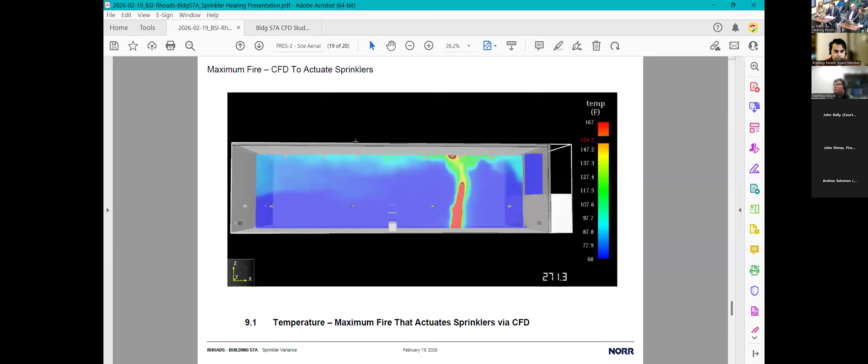I think Mr. Parikh had asked that question, whether it was required. So the ventilation is required. What was different, what we were proposing, was the automatic mechanical smoke removal. We'll get into that in a little more detail, but I just wanted to answer that question quickly.

Additionally, the question that was asked was for us to identify and analyze reasonable worst case scenario fires. Our experts spent additional time understanding the operational requirements of the proposed use, talking to Rhoads' operational people, reviewing their procedures, did additional computational fluid dynamic modeling, and came up with what he believed were the worst case fire scenarios. Bob will be testifying to that in a second. Ultimately, the pallet fire that we described was still the worst case fire that we could come up with reasonably.

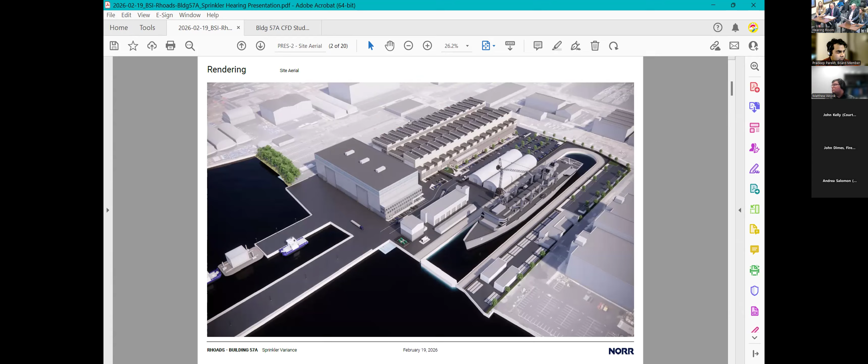One of the other things that was mentioned was the liquid propane gas line, if that were to catch fire. We reviewed that. That was actually lower in megawatts than the wood pallet fire, but we still looked at it. In that review and design, since we're trying to get this right, that requires a manual shut off at the tank farm. We're proposing an automatic shut off at the building, so if there is a fire event or detection, that'll automatically shut off that gas line versus relying on manual shutoff. That's one of the additional mitigation factors we're proposing.

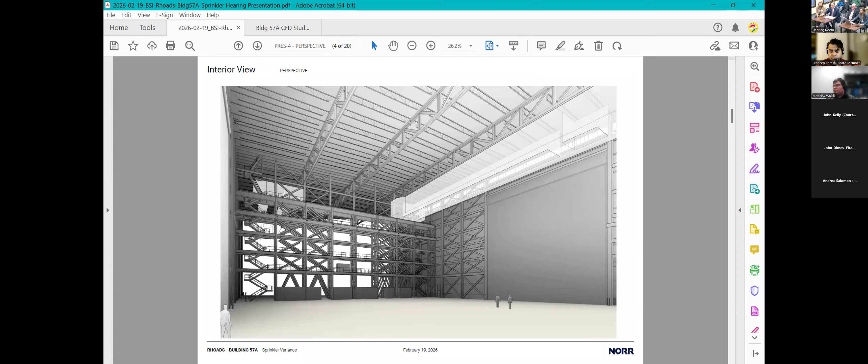Finally, for additional mitigation factors, and I'll get into this in more detail, but I just want to set the table: there were additional catwalks in the middle of the building. As you may recall, we have the office area, the toilet room areas, all fully sprinklered. The catwalk areas, there's 2 stories of catwalk areas that we expect to be occupied by workers during fabrication. We're proposing sprinklering those areas as well, where people will be occupied.

Speaking with the Rhoads team and Mr. Rhoads, we thought that was an additional safety measure for the lower ceiling areas where people are occupied, to add additional fire protection on those areas. I think the upper catwalk areas are really not typically occupied, so I think they're just for maintenance.

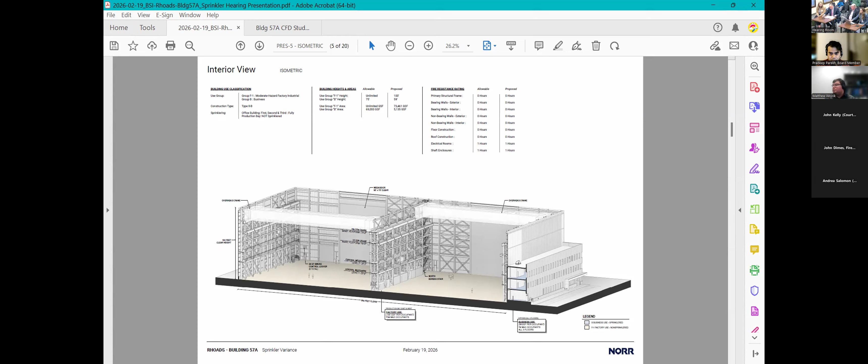So with that, I want to turn it over to Bob Moser to walk through some of the work that we've done, explain our findings, and then go into more detail on the additional mitigation measures. Bob, do you want to give a quick summary of the additional studies you conducted after our last meeting and what you found?

Yeah, so what I did was interview Rhoads to make sure I identified all the possible combustible loading for the facility. I came up with 9 of them, actually more like 10, but the last ones are well controlled. The combustible wood pallet is still a very significant fire risk. FM states that as one of their highest fire risks. It's like kindling, which is why it gives off so much heat.

The LPG piped into the building came in a close second. That came around 1.8 megawatts. It's a significant fire, so that would also be a very large fire.

I CFD modeled the LPG fire as well as the wood pallets. For the LPG fire, that gets significant heat at the ceiling, slightly below that of the wood pallets, but again well below sprinkler operating temperatures.

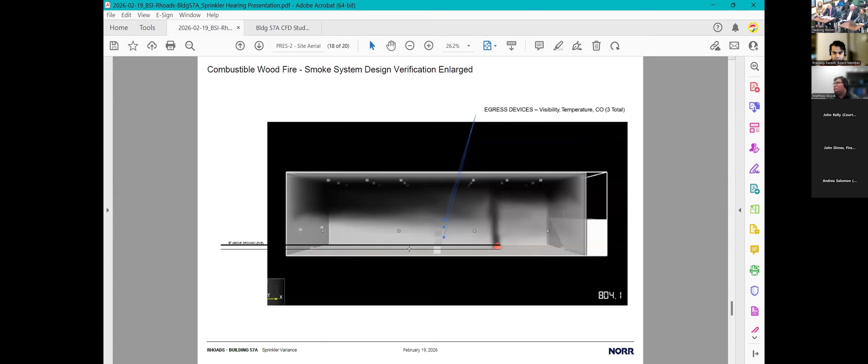Yeah, so that's what I did. I wanted to do a sensitivity analysis to find out where that number would be, because in the large scale fire testing, they came up with a number of 11.7 megawatts for a 2.5 - they came up with an 11.7 megawatt fire to set off 155-degree Fahrenheit sprinklers at a similar height. Actually, they were a little bit lower than this height, but that was the large scale fire testing.

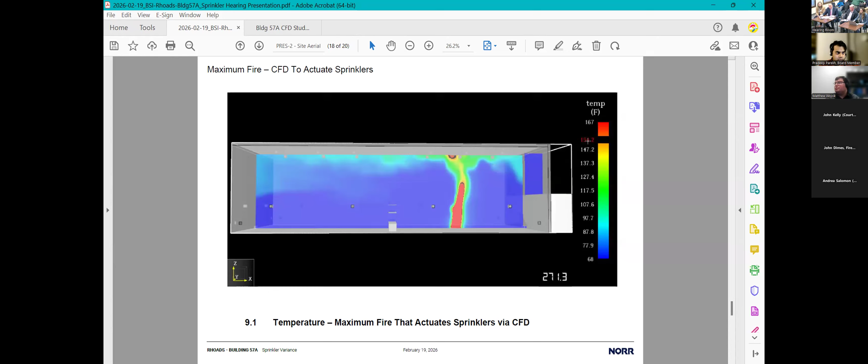So when we take the largest plausible fire, which was the pallets, the liquid propane, we discussed a cascading event where multiple things happened, because we wanted to make sure we looked at various scenarios, not just isolation. Like when things happen together. We looked at it, and I don't think it's linear, but even if you looked at it linearly, it's actually less than that. If you added a 2,500 kilowatt fire with the 1,800 kilowatt fire for the gas line going up, you're still well below the 10,000 kilowatts that would require the sprinklers to go off. So even if you added up all of these plausible fires, they still would not add up to enough.

Yeah, that's true. And one of the other things I looked at was the height rating of sprinklers. Sprinklers are only good to 60 feet, and we're at 102 feet, so we're well out of the range of sprinkler design.

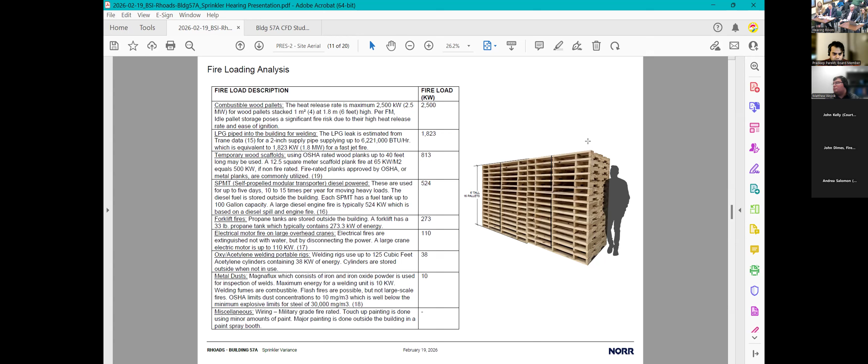Bob, tell us about the overhead cranes. Did you look at the overhead crane if that were to ignite? Yeah, I looked at the overhead crane, and that's an electrical fire. Basically speaking, if that went up, the way to stop an electrical fire is not to put water on it — that would be bad. What you need to do is shut off the electrical. So that's how you would address the crane electrical fire. And even so, it's not a large enough scale fire. Those are lower kilowatt, higher smoke type fires for electrical fire.

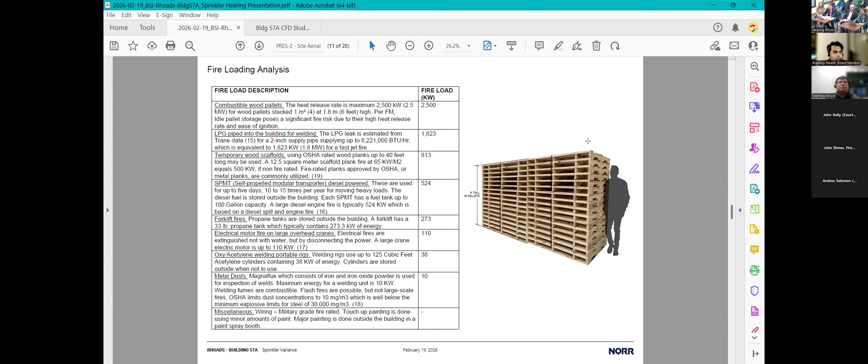Great. And then I think we walked through the heat. Do you want to just walk through the smoke controls? Yeah, what I found was, I went back, checked my modeling, went through everything, and it's up to a 75% reduction in the egress area if the smoke control was automatic and operated when the smoke developed. That's a significant savings in the amount of CO in those areas. That not only helps your egress, but also helps the firefighters if they have to fight the fire, since carbon monoxide is one of the most dangerous things you can expose anybody to during a fire.

So Bob, just so I'm clear, the smoke control is required, but it's manual — if someone has to go in, you have to turn it on in the fire room. And what we're proposing is automatic, so that when the fire alarms go off, when it detects smoke, the controls automatically go on and start to exhaust.

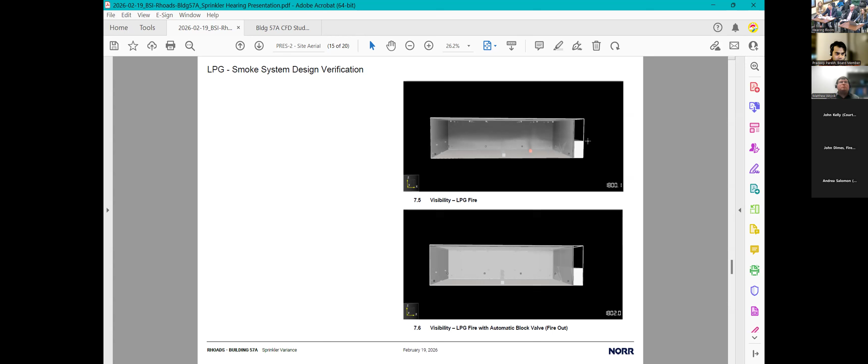So I looked at that too with the LPG fire. After 30 minutes, it exhausted all the smoke, which is really good, right after the fire. So I think it's beneficial to have an automatic versus a manual system. I believe the code just requires a manual system so firefighters could exhaust the smoke after the fire's over, but I think it's better to exhaust the smoke as the fire is going.

So again, I'm just a land use lawyer, so I'll speak like a layman here — the code really doesn't contemplate this type of building, correct? No, this is outside the realm of building code: 102 clear feet to a fire load, basically 10 stories open. So there's an inconsistency because the sprinkler requirement is rated at 60 feet and the building height is 102 feet.

So what we're proposing is additional mitigation measures that are not in the code, that we think will improve the physical condition here, even though it doesn't exactly fit in the box. So adding the additional automatic shutoff valve for the liquid propane gas, adding automatic venting beyond the code, and adding additional sprinklers in the occupied mezzanine catwalk areas. I guess that is required, but we wanted to make sure that we added that from our original proposal. So Bob, I'll leave it with this.

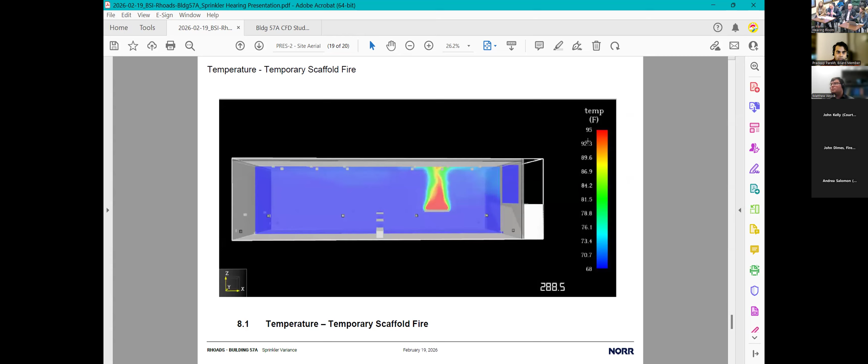So I guess the last thing we wanted to let you know is all of the worst case scenarios that we tried to study. So what you did, you put automatic smoke controls in, you sprinkled the mezzanine, and you put a shutoff valve in for the liquid propane gas, whatever's coming in. Automatic? Automatic, okay. The occupied parts of the mezzanines. Yes, correct, the occupied parts.

I did want to confirm with the fire department, would they prefer a manual shutoff with it? So let's say the system has automatically activated, would there ever be a time in firefighting operations where they would want to intervene and shut it off? Yeah, both would be good. I mean, the automatic function's great, but there may be a scenario where that could be the case.

I do have one other question though. Again, I tend to be on the side that if you put in a system where you really can't scenario a case you need it, just for the sake of putting it in doesn't seem prudent. However, being in the buildings I've been in, you can have the same type of occupancy, but later the process changes for some reason. Say you're building submarines or ships in this building, and all of a sudden, for whatever reason, the interior of the building, which maintains the same occupancy, now the design is different, and a sprinkler system would be beneficial.

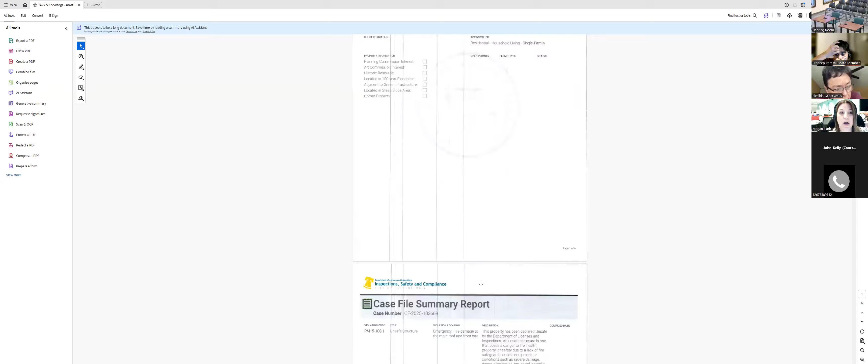And that is it. So the department is looking for a permit to be issued in 60 days. Okay, permit in 60 days? Yes, okay.

Miss, do you have anything to say about that? Yes, sir. As on record, we appealed it and reported that we did not have the insurance money at that time. The insurance letter came to me the second week in December of 2025. At that time, I tried to understand what my insurance, which is a lender-placed insurance, was and what their process was. It was quite difficult to understand because what they had on paper and what they were telling me were not quite the same.

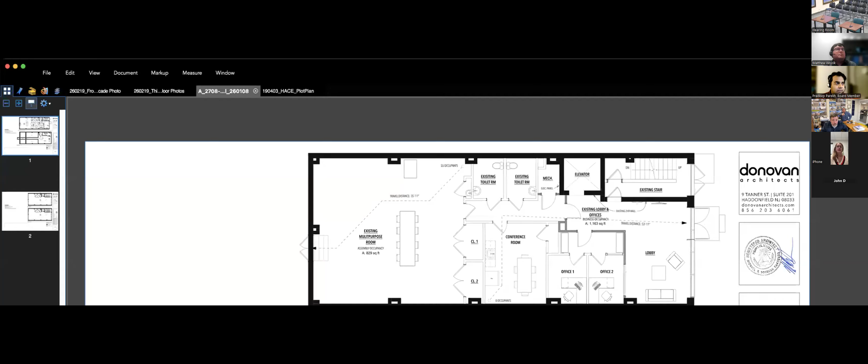If I may interject? Sure. Yes. When we purchased this building, it used to be a die cutting business, an industrial building many years ago. We purchased it to have one of our offices located on the corridor to provide services to small businesses. At the time, we couldn't occupy the second and third floor because we didn't have enough funds to install an elevator.

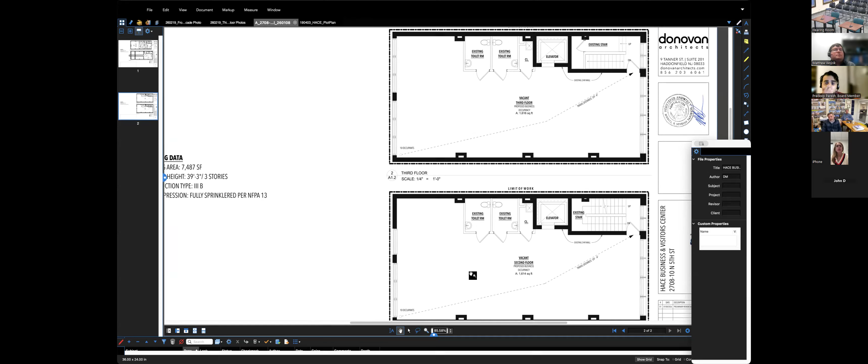And due to the commercial use of the building, we would have been required to install an elevator. Now that we have been able to raise the funds to install an elevator, that's why we wanted to activate the second and third floor, because even if we would have met the code, we still couldn't use that space because we needed an elevator for handicap access. Also, we're very restricted.

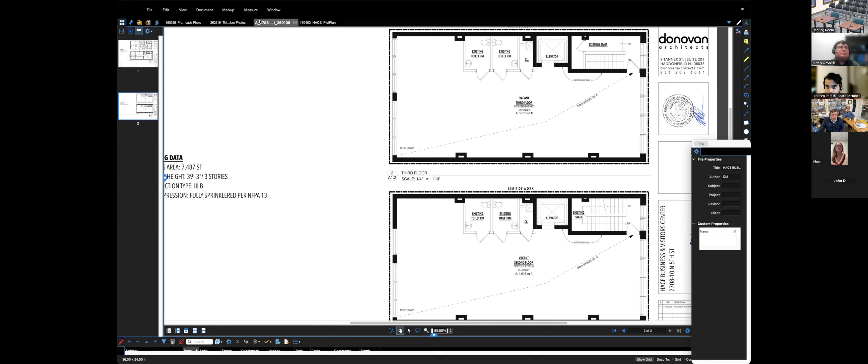If we had to build another means of egress, we would have done so. But the alleyway in the back, this building is pretty much boxed in, it's just a 2 or 3 foot alley. Even if we built a means of egress from the back, there's nowhere anyone can go because we're in essence boxed in. That's how those structures back in the day were built, and there isn't a lot of room back there.

Is this 4 floors or 3 floors? Three floors. There's just a stairway on the third floor that says going up. Yeah, that accesses the roof. There's a roof access. Oh, okay.

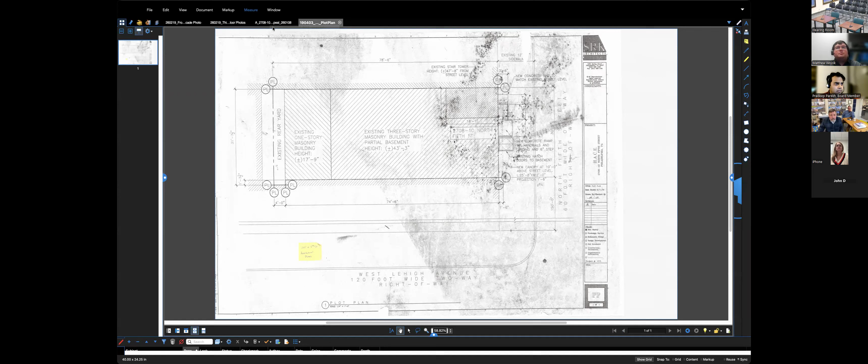So I have the plot plan up on the screen that shows the existing rear yard that's landlocked. So this is Lieutenant Dimes Fire Code. Is your contention that it's a 3-story fully sprinklered building and you don't need a second means and by right it should be allowed, or are you looking for a variance?

We're looking for a variance. We understand it's not permitted by right. Okay, I thought you had said that. Sorry, but it would be permitted on the second floor because we're under 20 occupants. Got it. And for L&I, the building isn't required to be sprinklered from what I can tell, but I just want to make sure. No, I don't believe so. The means of egress refusal doesn't depend on the building being sprinklered or not.

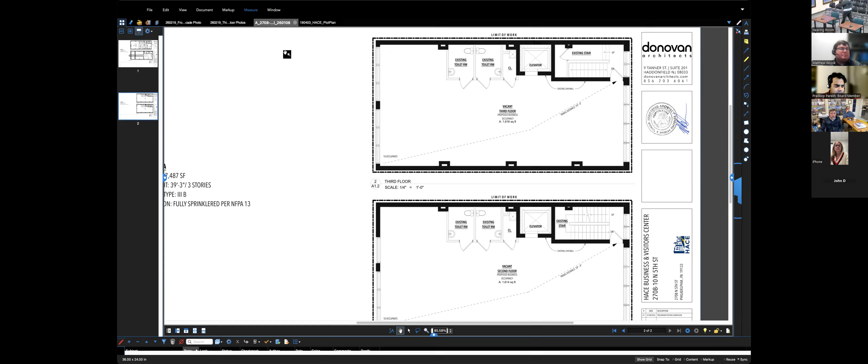It's the change to a higher hazard use, solely due to the affidavit of restricted use taking it from essentially nothing to something. So no matter what that something would be, it's always higher hazard because it's going from nothing. So if they had not gotten the affidavit of restricted use and they had just applied to do this, would it have not required a second means of egress?

I think they might run into that anyway because there are sections in the IEBC. I'm going to try and pull them up. And I guess the other question is, is a second exit required from the third floor and the second floor, or just the third floor? They can have a single exit from the second floor. The refusal is specifically about the third floor, because for the third story above grade plane and higher, it just says not permitted. Then there's no possibility to have it by right.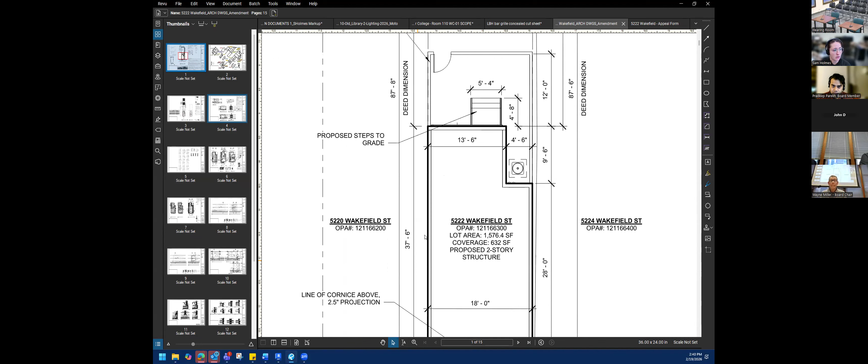Anybody have any questions on that? Yes, the only question is the yard you have there with the gate on - that would not be a locked gate, there would be easy access from the house out to that back area? That is generally the intent, yes.

Dimes, you have anything? Nope, I'm good. Okay. Okay, I'm good.

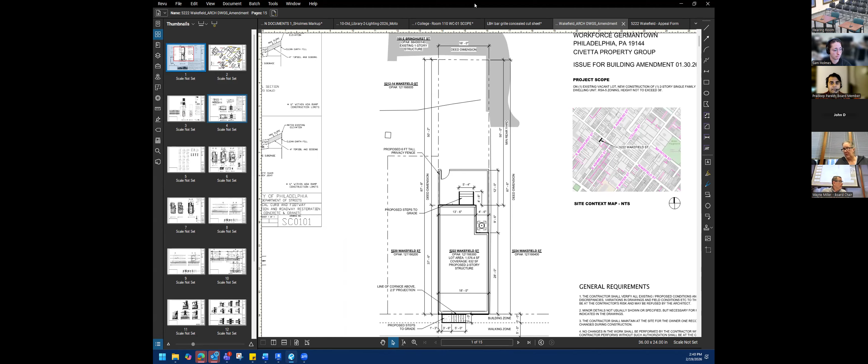And does that require a variance, given the 50 feet? It still does. The residential code doesn't recognize safe dispersal areas, only for commercial buildings. So I'm in favor of granting the variance of 50 feet in the rear yard. I agree to grant the variance. I agree to grant the variance. I agree to grant the variance.